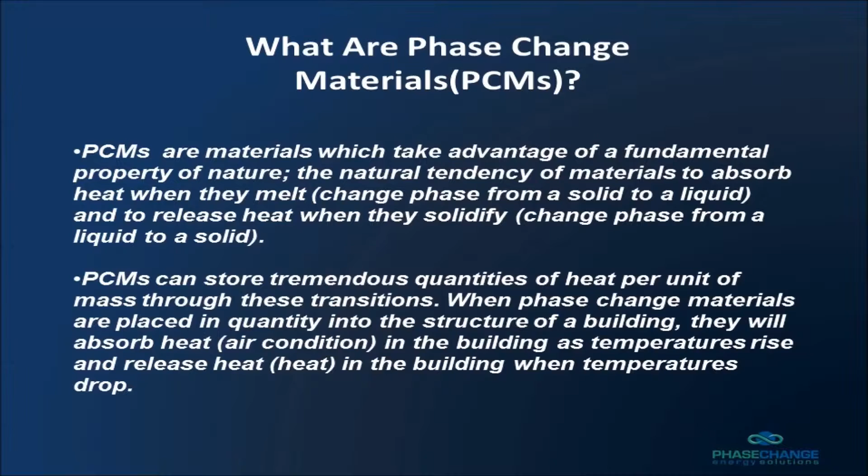If we take ice out of the fridge and we put it in the room, it does keep us cool in summer, but it's too cold and it melts quickly. And it's no good to us in winter. If we melted something that was very hot, say steel, at 1,000 degrees, then it would also phase change from a solid into a liquid and absorb a huge amount of heat while it turns from a solid to a liquid. That's another phase change.

Who can think of another phase change that happens almost every day in our work environment? Anybody? Air conditioning. The liquid that goes through the coils in the air conditioner evaporates into a gas, which is a phase change. And then we take it outside and we squash it back into a liquid again and release the heat outside. Okay, it's a phase change.

If you take a pot of water and you boil it on the stove, it hits 100 degrees, it doesn't get hotter, does it? So it's absorbing heat without getting hot. It's another phase change from a liquid to a gas. So phase change is not a new idea. The new idea is that it can be put into a package that you can put into your building and it stays stable for a very long time.

That's the challenge that's been out there for a very long time, to actually make phase change material into a building material. So the engineers in the US thought, how will we do this? They looked at using salts, because if you put salt in water, it changes its freeze point. They looked at using animal fat, but they thought that would be socially unacceptable. If you go to the fish and chip shop, you see the solid mass on top of the fryer, and they heat it up and it melts.

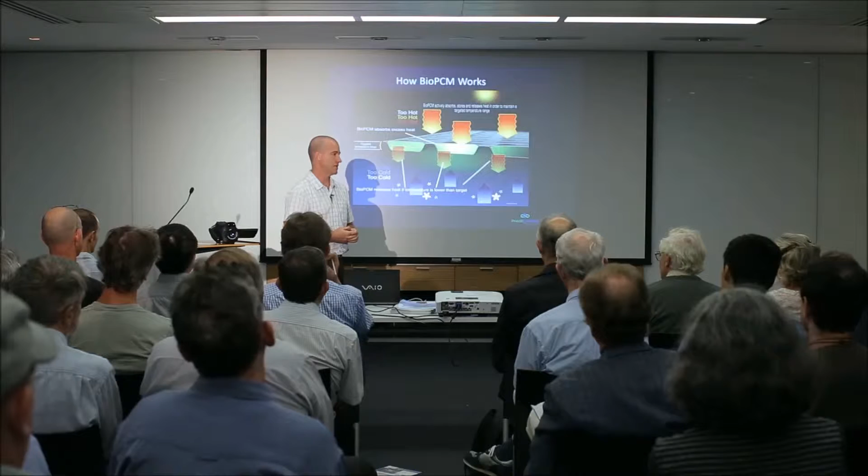Okay, it's phase changing. You take soap and you heat it up, it'll melt in your hands. It's phase changing. You take chocolate and you put it in your mouth. What happens? Yeah, it melts. It's phase changing. Okay, so lots of things phase change. So they looked at salts and they looked at petroleum products such as paraffin wax. You take a candle and you heat it up. What happens? It melts into a liquid.

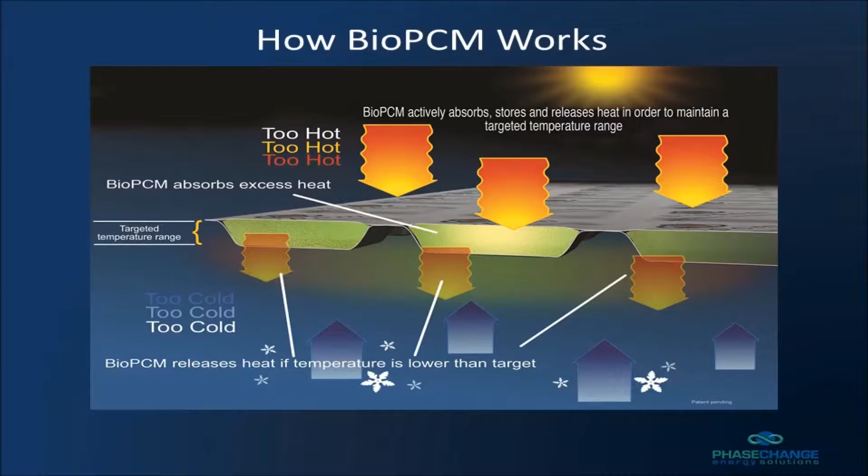It's another phase change. Some manufacturers in Germany, such as BASF, I think, and DuPont, developed phase change plasterboard. So they took plasterboard and they impregnated it with small balls of paraffin wax, candle wax, and they would put these plasterboard sheets on the wall and have an incredible building performance improvement.

The dilemma with it is that if you heat paraffin wax, it smells like a candle. So you end up with a house that smells a bit like a candle, which is not always so pleasant. So I believe they've actually taken it off the market. I'm not quite sure. The principle is good, but the delivery mechanism is the issue.

So looking at phase change material here, we've got a plastic mat, which you've all got a sample of. Does anybody not have a sample of the phase change? Yep. One for you. And I'm going to pass them to the back. Thank you. It's a plastic mat, and it's containing phase change material.

If you have a look at it on a thermal imaging camera, you have a look here. This is a thermal imaging camera. Has anybody seen one of these before? You might have seen the movie Predator. Okay. He had one of these. He wasn't really seeing it. He just had a camera. A thermal imaging camera basically has a whole array of little tiny sensors called microbolometers, and they detect temperature. And there's a crystal lens there that focuses the heat on it, and then it turns that into a picture.

So I've calibrated it to see cold to hot between about 20 and 35 degrees, which is why people are looking white, because they're above 35. If you take that sheet there, sir, and hold that up in front of the camera for me, you see the temperature of the mat is much cooler than the room. Now that mat was in Melbourne this morning on a concrete floor where it actually refroze itself. So it refroze itself using the night air.

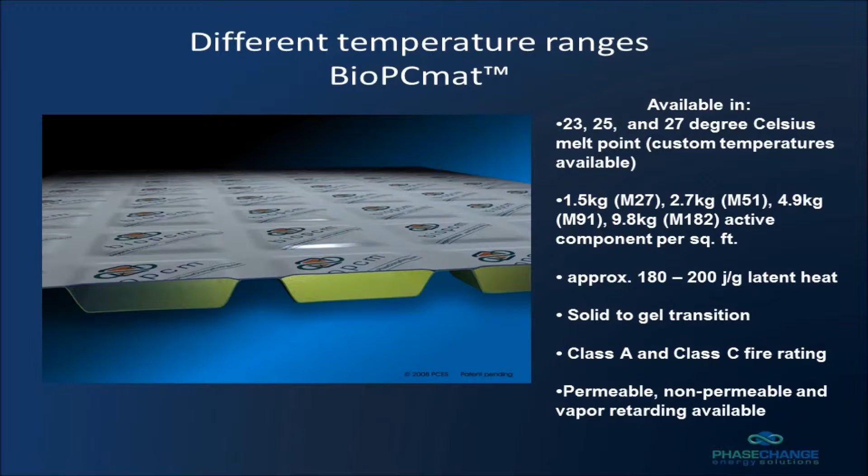For example, in my house, I've got 25-degree phase change material upstairs, and during a hot day, the room slowly climbs from 19 degrees to eventually hit about 25, 26 degrees by the end of the day. Now upstairs it used to get to 35, 36 degrees. Now it doesn't get past about 26, 27 in the middle of summer. Overnight, I just open the windows up and the night air comes in, provided the night air is below about 22, and the night air will refreeze the material back again ready for the morning.

And while it's refreezing it, I'm enjoying the room at 22 degrees because it's releasing the heat. So it doesn't have a negative effect on the comfort of the home. This mainly in the ceiling? Just the ceiling, yeah. I would love to have it in the walls too, but I don't want to pull my plasterboard off. Yeah, so if you want to go just ceiling, you can go a bit thicker. The thicker you go, the more thermal mass you have. You can't really put too much in.

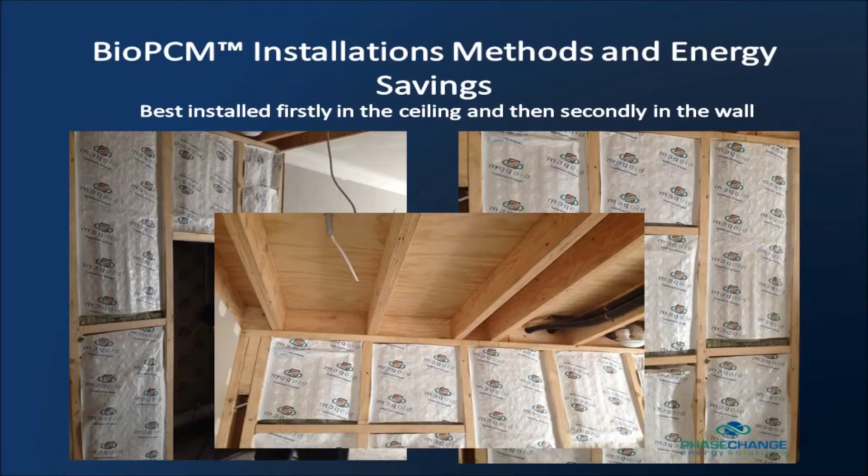This is a church that got converted into a house. They put a lightweight extension on top. Lightweight extensions are great because they're inexpensive to build, and you don't have to worry about support for steel to hold concrete slabs up to get thermal mass, which makes your house comfortable. The problem is that you've got no thermal mass, so therefore your building swings in temperatures.

If you have a building on a hot day with no thermal mass and you open up the doors and the heat comes in, then you close the doors, it doesn't matter how much insulation you have, it's hot inside. And you can't get it out unless you pump it out with an air conditioner. The difference is with phase change material, you open the doors on a hot day and you close the doors again, the material will suck all the heat out of the room and bring it back to 22 degrees again, depending on where it is in its melt cycle. So it's like an air conditioner, but you can't hear it, like the one you can hear up the back there.

Okay, in the same way, in winter time, if you have a warm house, let's say you've got a fireplace going and you've warmed up the ceiling with the fireplace, and then you open up the doors and all the cold air rushes in, and then you close the doors again, the house heats up again because the ceiling is melted and it has to reset to a solid to release its heat. This is the principle of phase change material. It's basically just stealing the heat and giving it back when you need it, or stealing the cold and giving it back when you need it.

And not like concrete where if it heats up too much, then it's a pain. Time consuming. You don't want it, exactly. So the good thing about phase change is if you've got a badly designed house, you still get a great benefit. In Melbourne, we have about 200 days per year where we don't have to heat and cool a house. I imagine it's probably fairly similar in Sydney. With phase change material, at my house, it's jumped up to about 300 days per year where I don't have to heat and cool actively.

I can just steal the cold of the night and I can just steal the heat of the day and just give it back when I need it. And all I do is I manage curtains and windows. It's very simple. Hot day, close the curtains, close the windows. Night time, open the curtains, open the windows, let the heat out. So it's like a very, very slow air conditioner. I'm charging it in the day and I'm releasing it at the night.

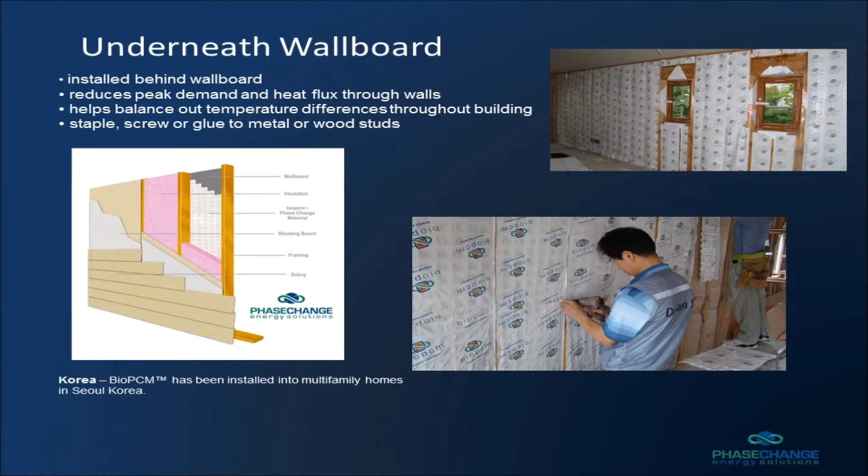When I look at the middle of winter, I want to keep it all closed. So I'll keep the curtains open so the sun can come in and a bit of heat will charge the ceiling. But if I don't get enough from the sun in the middle of winter, I light my fireplace. Or I could run my air conditioner in reverse cycle mode in the middle of the day.

But you said that the air temperature has to be 22 degrees or below, not above. What happens on those hot summer nights? That's a good point. You can get onto the Bureau of Meteorology website, and David can help you with that if you don't know how to do it. And within it, you can actually put your region in, and you can tell how many nights per year the temperature does not fall below 20 degrees. And you can count them. And you can say, right, there's 16 days here in Sydney where the temperature at night doesn't fall below.

Those nights, the phase change material won't reset itself. Okay, then you could put more mass in so that you can get through 2 days. And if you might have 2 nights in a row where it doesn't get below 20 degrees, you could have more mass and get through 3 days. It's quite possible to go through the entire year without actually having any heating and cooling if you have enough phase change material.

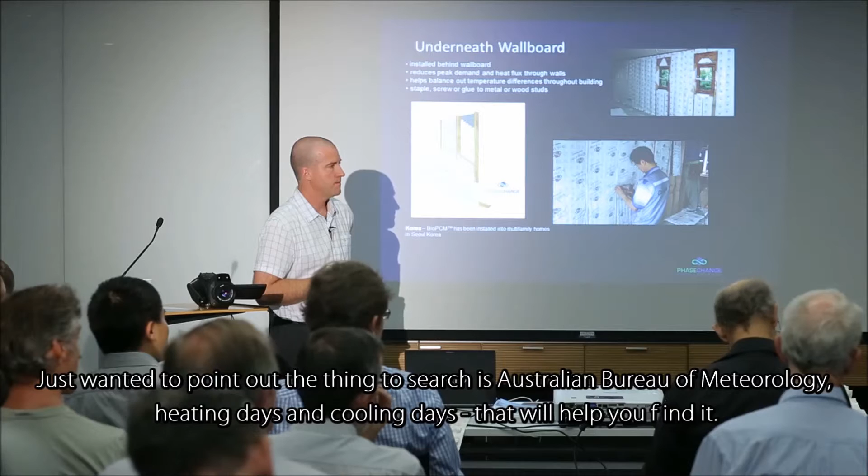I just want to point out the thing that you referred to there. The thing to search for on the Australian Bureau of Meteorology is heating days and cooling days. That will help you find it. Yeah, that's right. So now, you talked about putting the air conditioner on in the winter during the day to warm it up. Yep, you can do that.

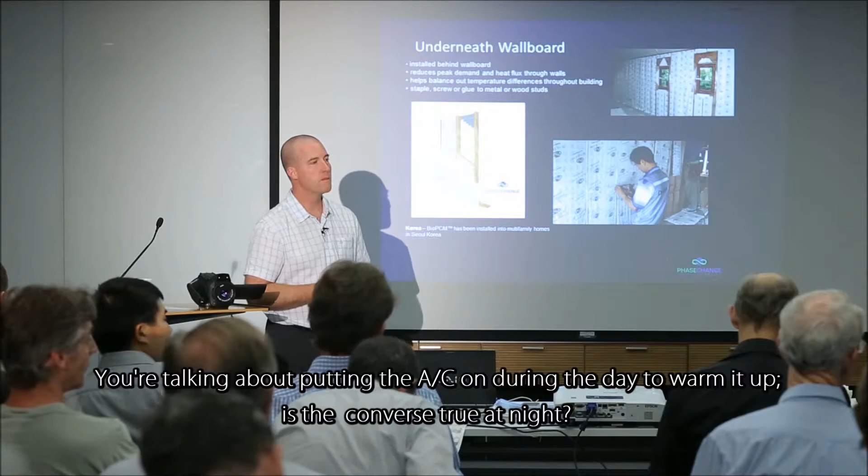That's true at night. In summertime, you could use off-peak after. Yes, exactly. You can pre-freeze the house. In Queensland, we're talking with the Queensland government, and their dilemma is that people get home from work at 3 o'clock, because they're Queenslanders, so they get to do that. And they all put their air cons on at once because it's stinking hot and they had a hard day. Fair enough. The problem is the grid can't handle that.

So they have to put a big grid in with a big power station to feed the power for that 4-hour window from 3 p.m. till 7 p.m. And that's expensive, which adds cost to the people, the taxpayers, and adds cost to the new land being released. So what we're doing in Queensland is we're using solar panels on the roof to run the air conditioner while they're at work, which is free electricity.

Pump the heat out of the phase change material in the middle of the day, get it down to 20 degrees. They get home, turn off the air conditioning, and the house is pre-frozen at 20 degrees, ready for them to enjoy their night. So free cooling in Queensland. Much better than paying for 38-cent shoulder tariffs and things they've got now.

What's better, if you had a flat roof, on the top of the roof, underneath the... Okay, the question is, where's the best place to install phase change material? Closest to the people. So in between the plasterboard or the timber lining and the insulation itself. Because you're trying to control and stabilise the internal temperature. You're not trying to control the external temperature.

In extreme climates like Port Hedland, Marble Bar, you can put phase change externally as well, and that'll resist the heat getting to the insulation in the first place, and the night desert air will refreeze it, so it will give it a better thermal property. But for the most part, you don't need to do it.

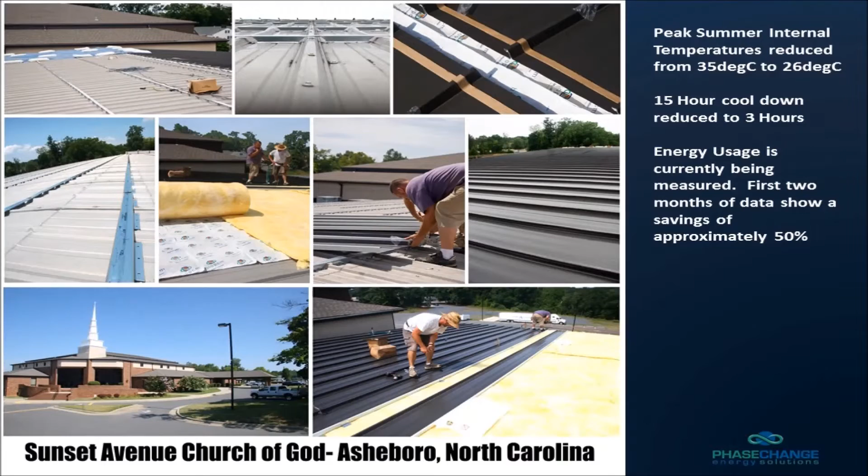You see here's a church that was done in Asheboro, North Carolina, where the temperature fell dramatically after putting phase change material in with new insulation. Huge energy savings. This is a very interesting graph. This really sums up what phase change material does.

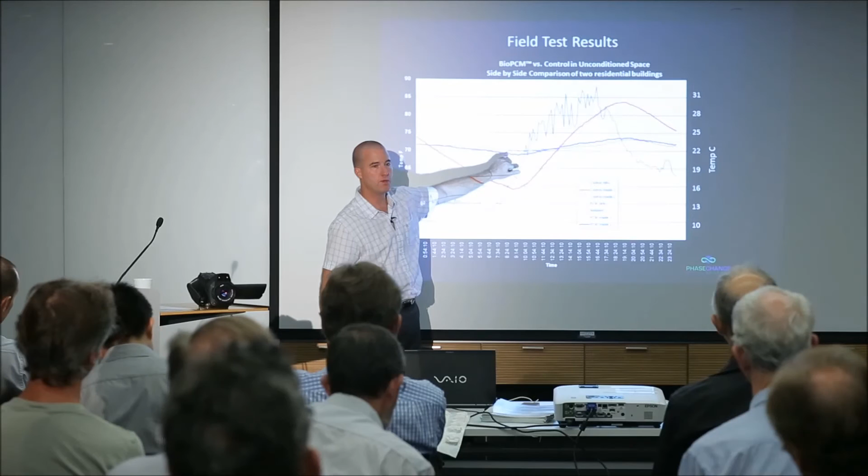With phase change material, here we're releasing heat, which is keeping you warm. So we're not getting below 21 degrees or so. And then here we're absorbing heat, keeping you cool. So simply by using the natural process of melting and resetting, we can actually stabilise the building temperature.

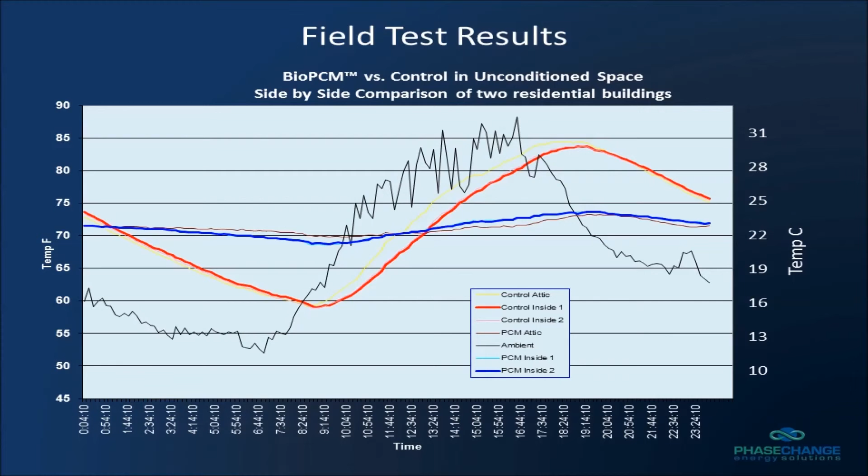And the way that you do it is you simply use your windows and your curtains. It's that simple. And if that's not good enough, you can use your air conditioning on reverse cycle mode to pump heat in or pump heat out. A very small air conditioner can do an enormous amount of work.

In my house, the living area is about 50 squares. It's quite big. I've got 5 kids. We used to use a lot of electricity. My electricity bill is about $1 a quarter. That's thanks to solar power, which helps produce my electricity. It's also thanks to the fact that I hardly use any heating and cooling.

But I do have an air conditioner there because I do like it cool on the stinking hot nights. So on those hot nights, I put my 2 kilowatt air conditioner on and I pre-freeze my ceiling overnight on off-peak rate to get it ready for the next hot day, if the night is actually above 20 degrees. This summer, I think I used the air conditioner 4 times to do that. So a single 2 kilowatt air conditioner, I used it 4 times across summer.